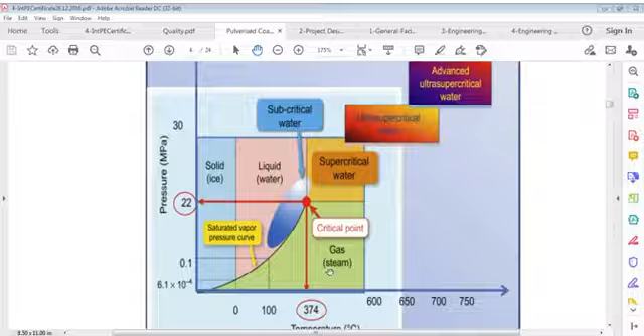When you go from freezing temperature to 374, meaning a rise in temperature - 374 is too high, 100 is the boiling temperature here - between 374 and pressure from 22 MPa to 30, it's liquid water. Of course it's hot, and this range is called subcritical water. This elliptical, parabolic curve represents subcritical water.

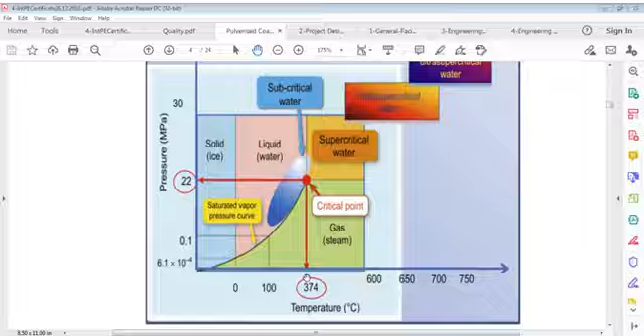If the temperature range goes from 374 onwards to 600, up to pressure 22, this is gas or steam, lying within the range of 374 degrees to 600 degrees. It's too high, even though boiling temperature is 100 - steam starts building in, but 374 is very high. Steam ranges from 374 to 600-800 degrees. This is gas, steam, up to pressure 22 MPa.

If you go in the same temperature range from pressure 22 to 30 MPa, it is supercritical water. So this is subcritical water below 374 degrees Celsius, and between 374 to 600 degrees Celsius with pressure 22 to 30 MPa is supercritical water. And this is gas. Then going further, let's see what happens there.

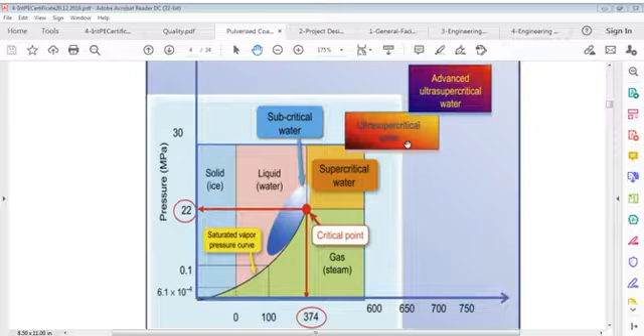This is not shown here - it's called advanced ultra supercritical water. In this stage, ultra advanced ultra supercritical water, and this is ultra supercritical water, where temperature rises and pressure rises.

This is what it shows. Going further, now it discusses supercritical power plants. Supercritical power plants were in service in the late 1950s, but the technology did not really take off due to problems of reliability, especially from metallurgical aspects.

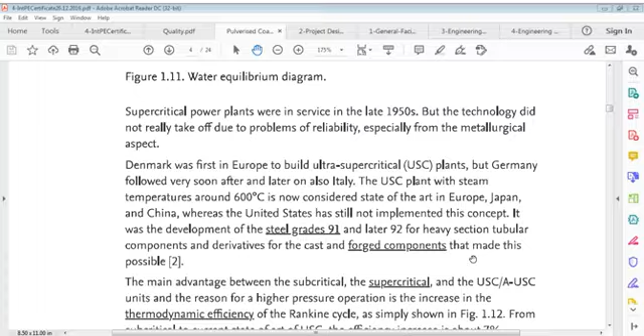Denmark was first in Europe to build ultra supercritical plants, but Germany followed very soon after, and later Italy too. Ultra supercritical plants with steam temperatures around 600 Celsius are now considered state of the art in Europe, Japan and China, whereas the United States has still not implemented this concept.

It was the development of steel grade 91, and later 92, for heavy section tubular components and derivatives for cast and forged components that made this possible.

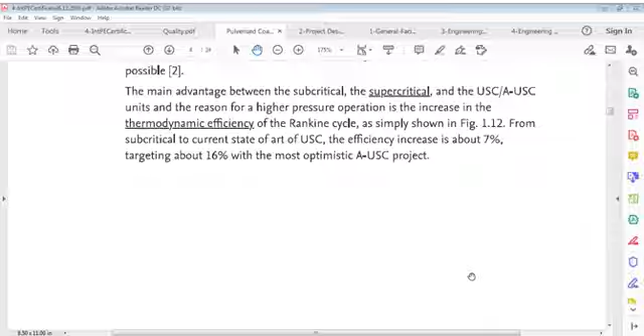The main advantage between subcritical, supercritical and ultra supercritical units, and the reason for higher pressure operation, is the increase in thermodynamic efficiency of the Rankine cycle. From subcritical to the current state of the art ultra supercritical, efficiency increases by about 7%, targeting about 16% with the most optimistic ultra supercritical project.

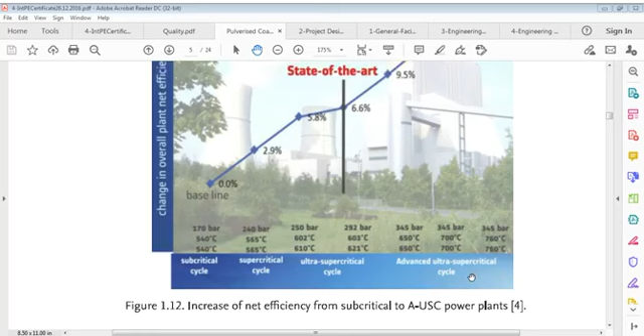Now this curve shows the increase of net efficiency from subcritical to ultra supercritical power plants. Subcritical cycle is here at 170 bar, 540 degrees; supercritical cycle is 565 degrees, 240 bars; ultra supercritical cycle is 250 to 292 bars, 610 to 621 degrees. Then advanced ultra supercritical from 345 bars onwards, at 650, 700 and 760 degrees Celsius. This is the baseline change in overall plant net efficiency.

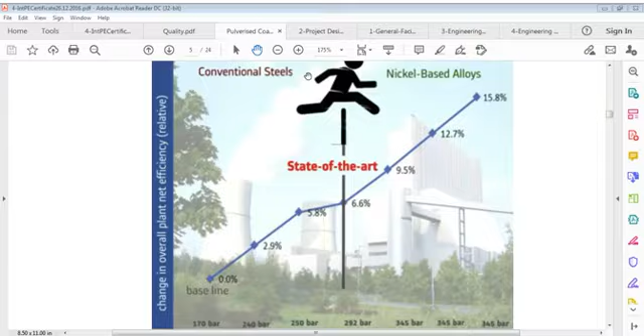This shows conventional steel and nickel based alloys - this is state of the art, with a dividing line here. You see the baseline is here.

0.0%, then it goes to 2.9% in this range, 5.8% at 250 bar with temperature rising - the percentage efficiency shown here too. At the critical line it's 6.6%, at 345 bar and 650 degrees Celsius it's 9.5%, then it goes up to 16%, 15.8% for nickel based alloy.

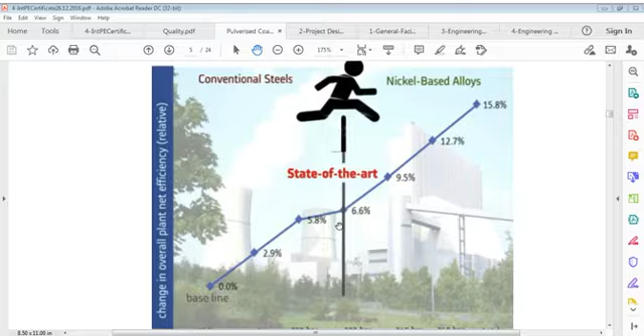So this goes from 6.6% baseline percent to 15.8% with nickel based alloys, compared to conventional steel. So nickel adds to that efficiency, you can say.

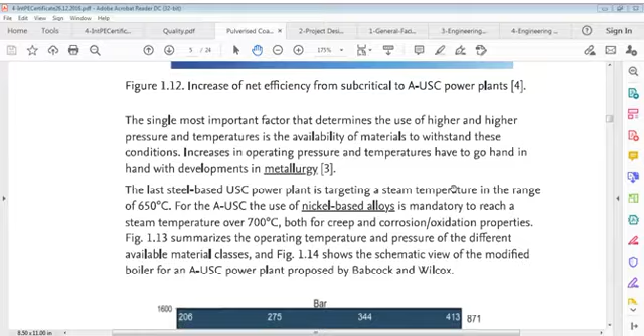Then we come to the single most important factor that determines the use of higher and higher pressures and temperatures: the availability of materials to withstand these conditions. Increases in operating pressure and temperature have to go hand in hand with development in metallurgy.

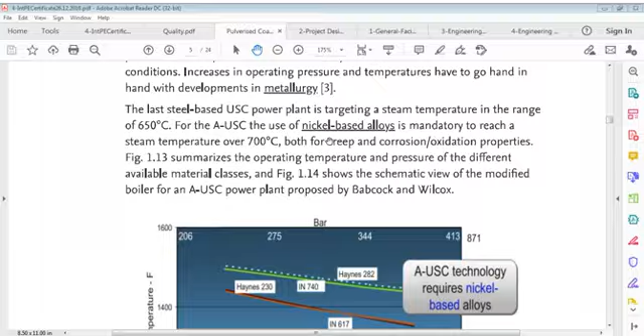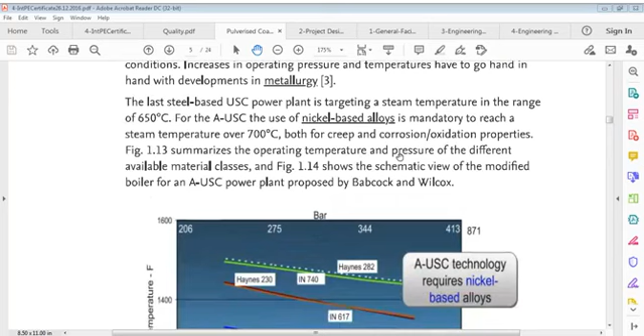Last steel-based ultra supercritical power plant is targeting a steam temperature in the range of 650 degrees Celsius. For A-USC, use of nickel-based alloys is mandatory. Use of nickel-based alloy is mandatory to reach a steam temperature over 700 degrees Celsius, both for creep and corrosion, oxidation properties.

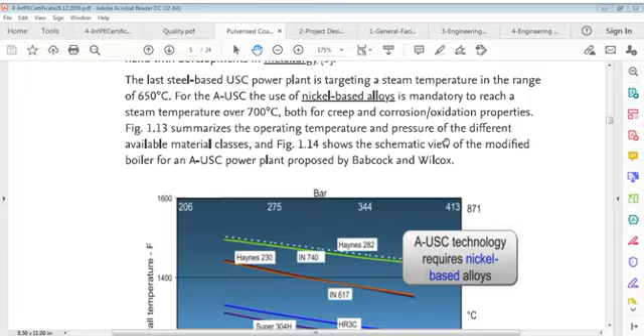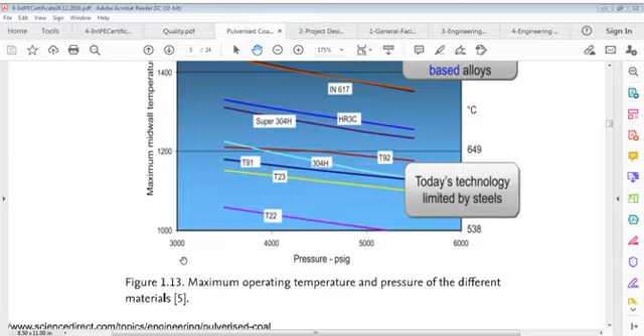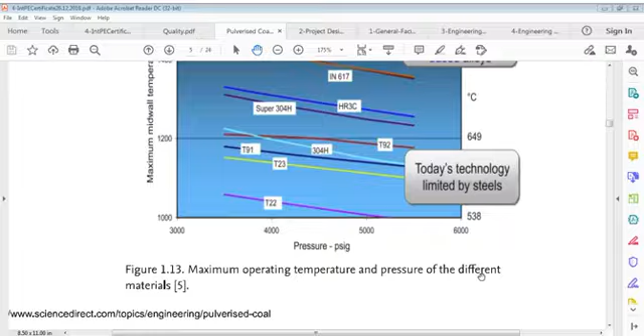This figure summarizes the operating temperature and pressure of different available material classes. Schematic view of a modified boiler for an A-USC power plant project proposed by Babcock and Wilcox. Pressure ranges from 3000 to 6000, and maximum mid-wall temperature is up to 1600 degrees from 1000 onwards. Today's technology is limited by steel, while A-USC technology requires nickel based alloys, shown in this range. Temperature is 1400, from here you can see 617, here 740 - this shows maximum operating temperature and pressure of different materials.

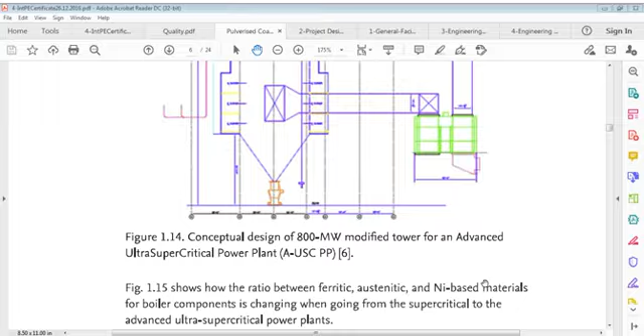Then we go to this diagram, which is a conceptual design of an 800 megawatt modified tower for an advanced ultra supercritical power plant. This is how it works.

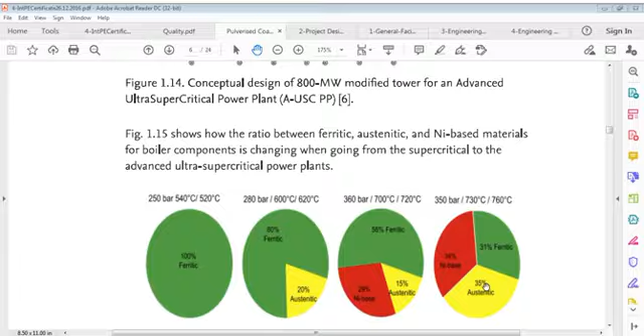This shows the ratio between ferritic, austenitic and nickel based materials for boiler components, changing when going from supercritical to advanced ultra supercritical power plants. At 250 bar, 540/520 degrees, it's ferritic. At 280 bar, 80% ferritic. This is 56% ferritic and this is 31% ferritic - these are various stages.

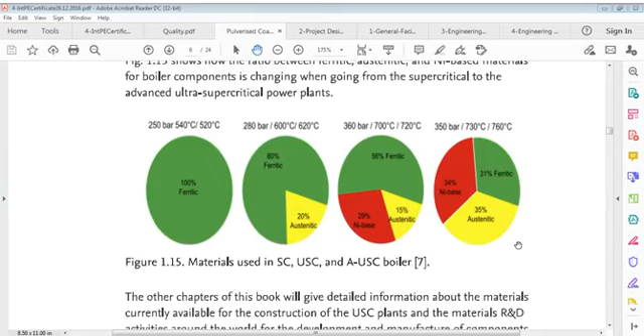Other chapters of this book will give detailed information about the material currently discussed.

Our issue was pulverized coal fired boilers - pulverized coal, which is our topic here. Pulverized coal firing ensures complete combustion of coal, thus ensuring higher efficiency of steam generators. It's predominantly adopted in large coal-fired utility boilers. Finer grinding of coal leads to more efficient combustion.

The total time required from the entry of a coal particle into a furnace to the combustion of the particle is very short. This time, however, is dependent on various factors.

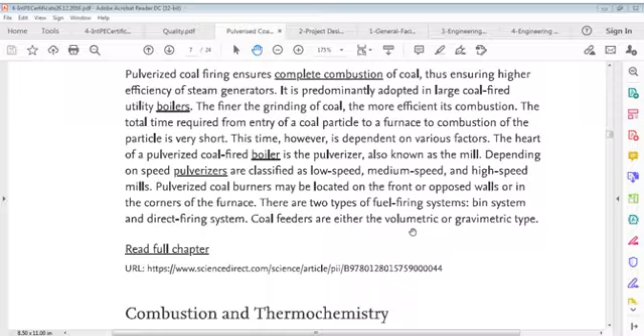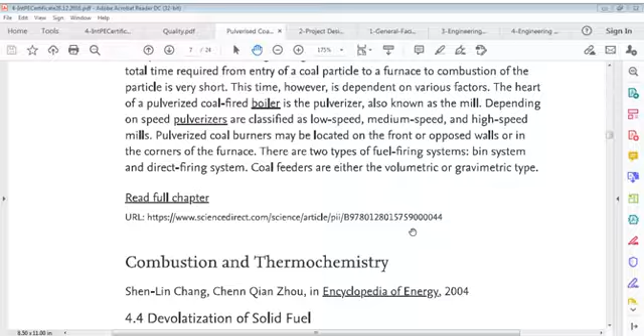The heart of a pulverized coal fired boiler is the pulverizer, also known as a mill. Depending on speed, pulverizers are classified as low speed, medium speed and high speed mills. Pulverized coal burners may be located on front or opposed walls or in corners of the furnace. There are two types of fuel firing systems: bin system and direct firing system. Coal feeders are either volumetric or gravimetric type.

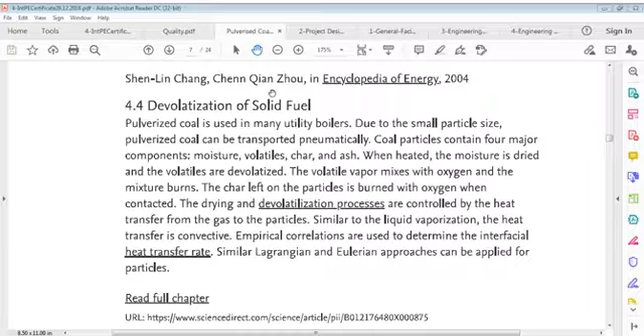Combustion and thermochemistry. Devolatilization of solid fuel - pulverized coal is used in many utility boilers. Due to small particle size, pulverized coal can be transported pneumatically.

Coal particles contain four major components: moisture, volatiles, char and ash.

When heated, moisture is dried out and volatiles are devolatilized. The volatile vapor mixes with oxygen and the mixture burns. The char left on particles is burned with oxygen when contacted.

Drying and devolatilization processes are controlled by heat transfer from gas to particles. Similar to liquid vaporization, heat transfer is convective. Empirical correlations are used to determine the interfacial heat transfer rate. Similar Lagrangian and Eulerian approaches can be applied for particles.

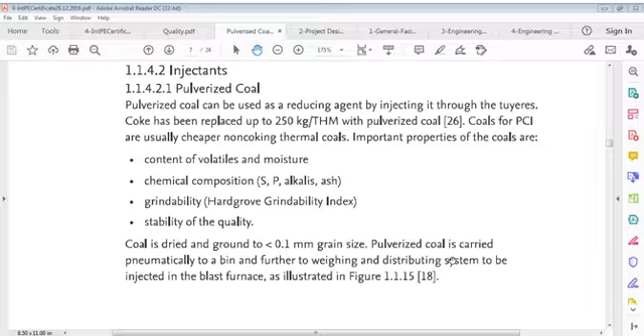Coal is dried and ground to less than 0.1 mm grain size - that's one-tenth of a millimeter. Pulverized coal is carried pneumatically to a bin and further to a weighing and distributing system to be injected into the blast furnace. Let us see this.

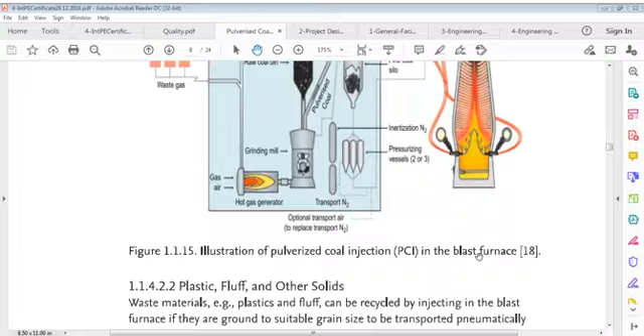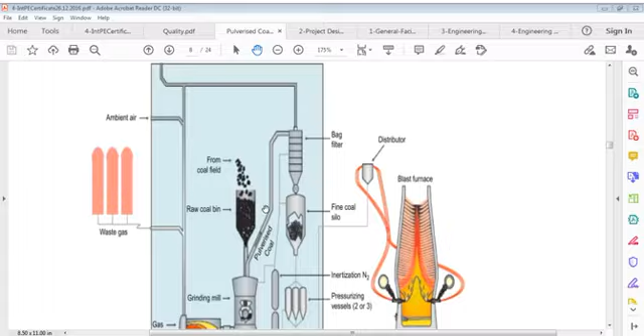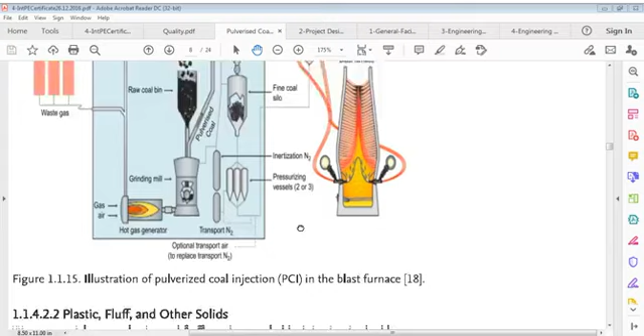Hot gas generator: waste gas and ambient air come here, go to the gas and air hot gas generator, then to the grinding mill. Raw coal comes from the coal field to the raw coal bin, and pulverized coal goes to the bag filter from the fuel gas, ending up in the fine coal silo. It comes via transport nitrogen to the fine coal silo and bag filter, followed by inertization and pressurization.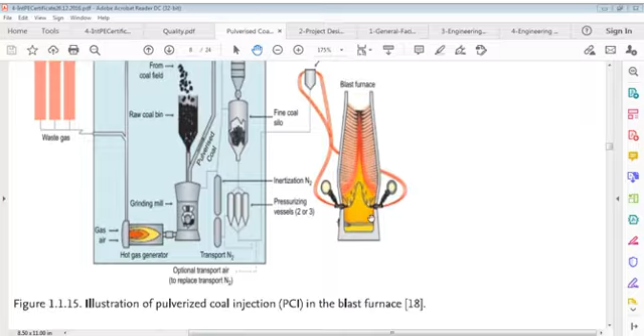Blast furnace. Plastic, fluff, and other solids.

Waste materials like plastics and fluff can be recycled by injecting them in the blast furnace, if they are ground to a suitable grain size to be transported pneumatically, and if they contain enough carbon that can be oxidized.

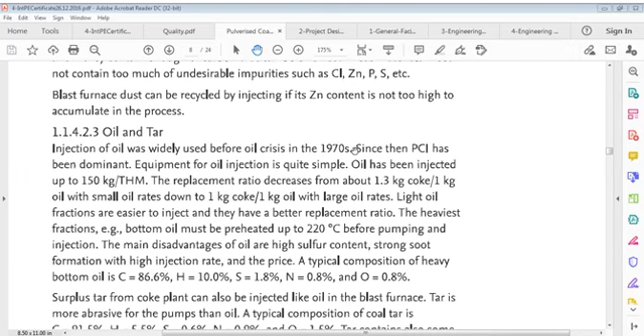These materials must not contain too much undesirable impurities such as Cl, Zn, P, S, etc. Blast furnace dust can be recycled by injecting it if its Zn content is not too high to accumulate in the process. Oil and tar.

Injection of oil was widely used before the oil crisis in the 1970s. Since then, pulverized coal injection has been dominant. Equipment for oil injection is quite simple.

Oil has been injected up to 150 kg per THM. Replacement ratio decreases from about 1.3 kg coke per 1 kg oil with small oil rates down to 1 kg coke per 1 kg oil with large oil rates.

Light oil fractions are easier to inject and have a better replacement ratio. Heaviest fractions, bottom oil, must be preheated up to 220 degrees Celsius before pumping and injection. Main disadvantages of oil are high sulfur content, strong soot formation with high injection rate, and price.

A typical composition of heavy bottom oil is C = 86.6%, H = 10%, S = 1.8%, N = 0.8%, and O = 0.8%.

Surplus tar from the coke plant can also be injected like oil in the blast furnace. Tar is more abrasive for pumps than oil, and its composition is given here.

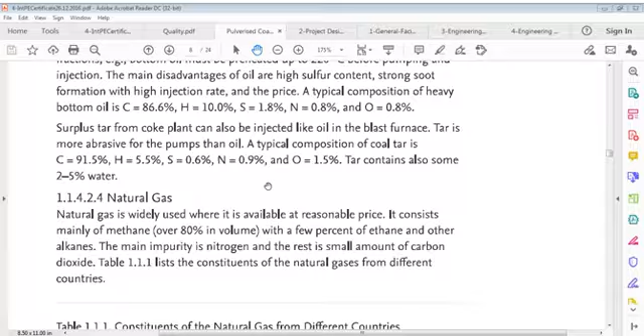Natural gas is widely used where available at reasonable price. It consists mainly of methane, over 80% in volume, with a few percentage of ethane and other alkanes. Main impurity is nitrogen, and the rest is a small amount of carbon dioxide.

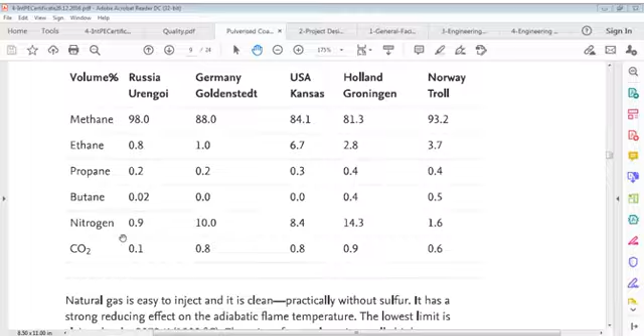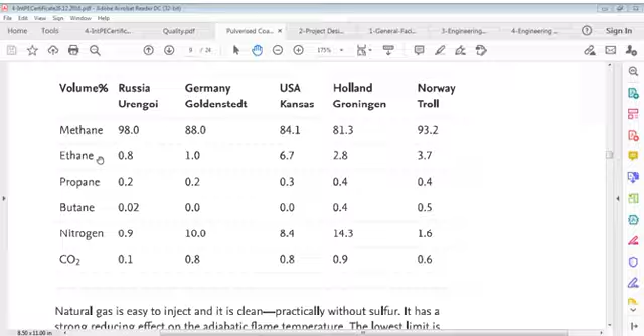Natural gas is easy to inject and clean, practically without sulfur. It has a strong reducing effect on adiabatic flame temperature; the lowest limit is claimed to be 2073 Kelvin or 1800 Celsius. The price of natural gas is really high.

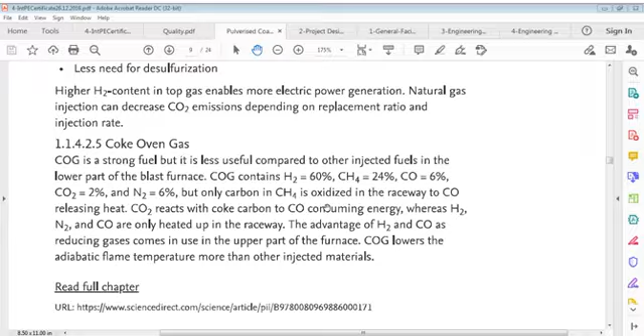Low sulfur content brings several benefits: better working conditions in the cast house, higher carbon content in hot metal, and less need for desulfurization. Higher H2 content in top gas enables more electric power generation. Natural gas injection can decrease carbon dioxide emission depending on replacement ratio and injection rate.

Coke oven gas, COG, is a strong fuel but less useful compared to other injected fuels in the lower part of the blast furnace. Coke oven gas contains hydrogen H2 60%, CH4 24%, carbon monoxide 6%, carbon dioxide 2%, and nitrogen 6%.

Only CH4 is oxidized in the raceway to carbon monoxide, releasing heat. CO2 reacts with coke carbon to form CO, consuming energy, whereas H2, N2 and CO are only heated up in the raceway. The advantage of H2 and CO is they are reducing gases.

They come into use in the upper part of the furnace. COG lowers adiabatic flame temperature more than other injected materials. Electric power generation, fossil fuel.

Pulverized coal combustion in supercritical steam cycle.

Pulverized coal fired supercritical steam boilers have been in use since the 1930s, but improvements in materials and increasing demands for higher efficiency are making this the system of choice for new coal-fired utility plants worldwide.

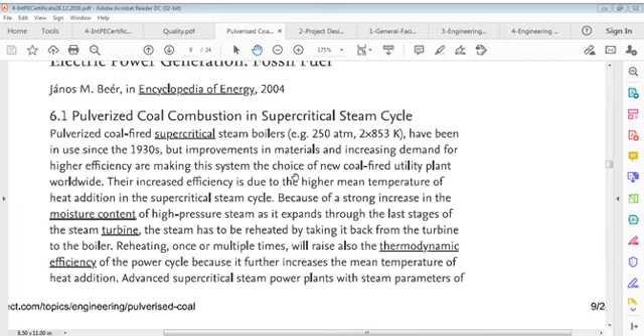Increased efficiency is due to higher mean temperature of heat addition in the supercritical steam cycle, because of the strong increase in moisture content of high pressure steam as it expands through the last stages of the steam turbine.

Steam has to be reheated by taking it back from the turbine to the boiler. Reheating once or multiple times will also raise the thermodynamic efficiency of the power cycle because it further increases the mean temperature of heat addition.

Advanced supercritical steam power plants with steam parameters of 300 atm pressure, temperatures of 866 Kelvin, and cycle efficiency up to 43% are expected to play a major role in new power generation in the near future.

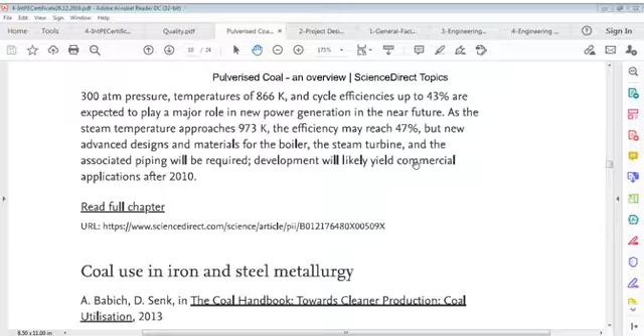As steam temperature approaches 973 Kelvin, efficiency may reach 47%, but new advanced designs and materials for the boiler, steam turbine, and associated piping will be required. These developments will yield commercial application soon.

Coal used in iron and steel manufacturing, steel metallurgy, and blast furnace iron making. Carbon used in the blast furnace in the form of both coke and auxiliary reducing agent is discussed now.

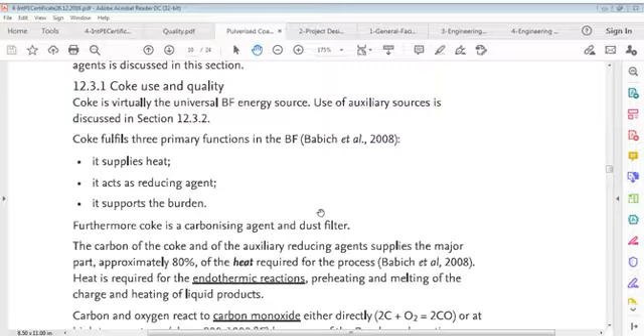Coke use and quality: coke is virtually a universal energy source. Coke fulfills three primary functions - it supplies heat, it acts as a reducing agent, and it supports the burden. Coke is also a carbonizing agent and dust filter.

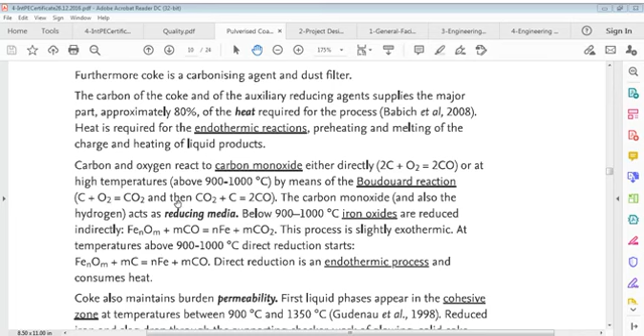Carbon of coke and of the auxiliary reducing agent supplies the major part, approximately 80%, of the heat required for the process - heat required for endothermic reactions, preheating, and melting of charges.

Carbon and oxygen react to form carbon monoxide, either directly via 2C plus O2 gives 2CO, or at high temperature of 900 to 1000 degrees Celsius by means of the Boudouard reaction.

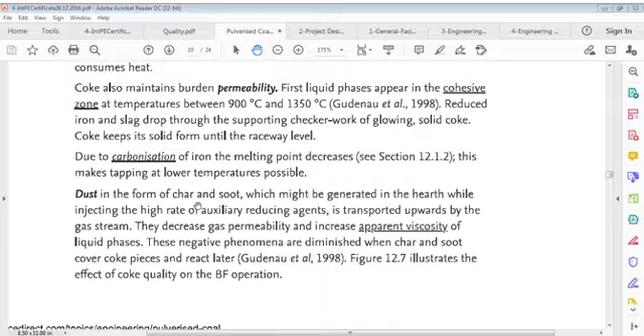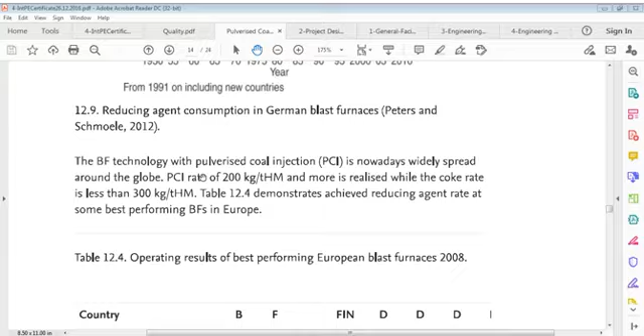What we are searching for is coke degradation, alright, it's all that. For our purposes, the other one - this is reducing agent consumption of German blast furnaces, year-wise. Then we can go on further, it's very technical, so no need to waste time here.

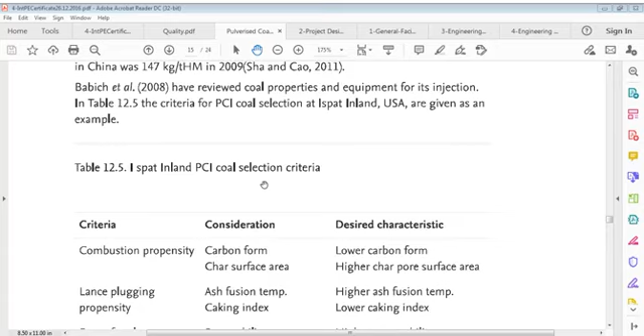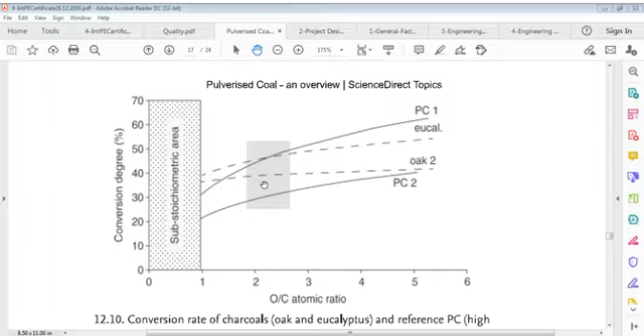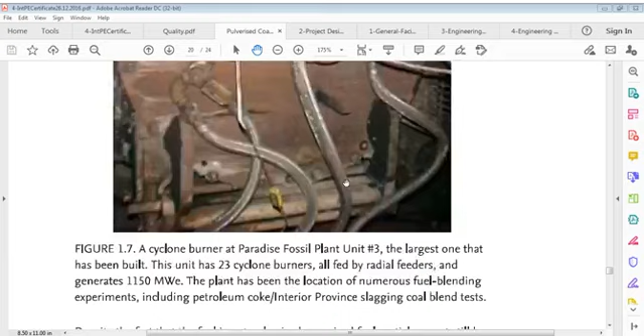I'm interested in pulverization, that's very important, and this is conversion degree. Types of firing systems - this is here, cyclone burner at Paradise fossil plant. Well, I think there's not much available for this. Let us see what it says.

Pulverized coal consists mostly of particles capable of passing through a 200 mesh screen, which corresponds to a diameter of 74 microns and lower. For coals of high volatility and low ash content, combustion characteristics are comparable to those of liquid fuel sprays.

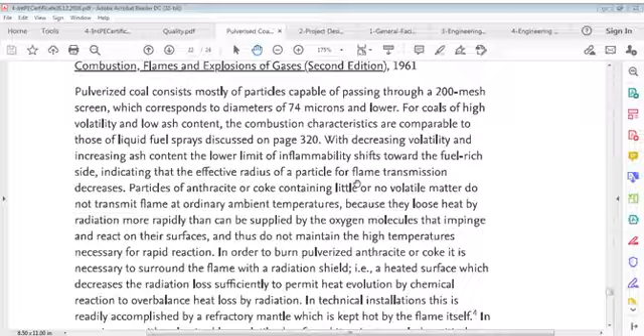With decreasing volatility and increasing ash content, the lower limit of inflammability shifts towards the fuel-rich side, indicating the effective radius of a particle for flame transmission decreases.

Particles of anthracite or coke containing little or no volatile matter do not transmit flame at ordinary ambient temperatures, because they lose heat by radiation more rapidly than can be supplied by oxygen molecules that impinge and react on their surfaces, and thus do not maintain the high temperatures necessary for rapid reaction. In order to burn pulverized anthracite coke, it's necessary to surround the flame with a radiation shield.

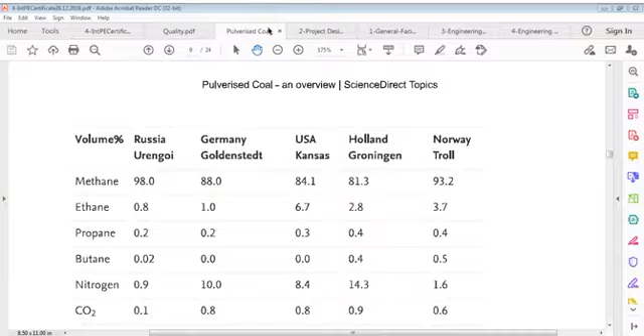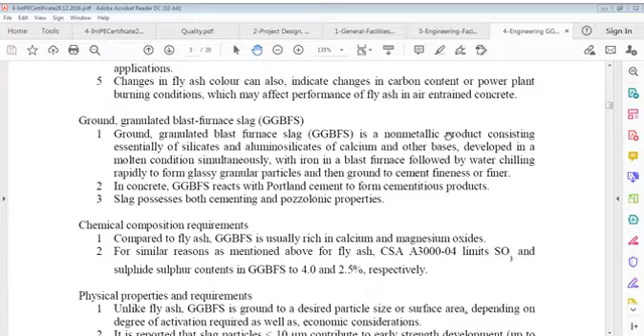Alright, I think this is over. So we have gone through this talk. We're going to find more material after that, so better I close this for now, and go back to that file - where is that? And project designs, general facilities - I think this is engineering facilities, petrochemicals. This is GGBS, that's what I was talking about. We're talking about this, we are here, we've gone like this.

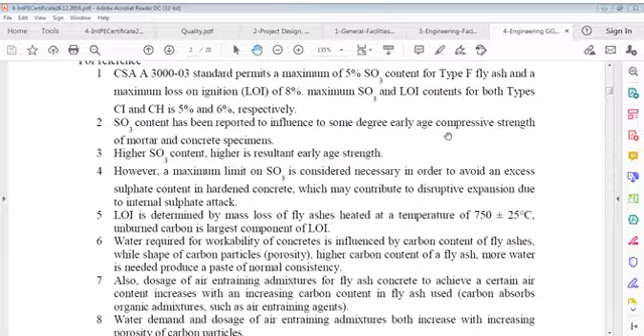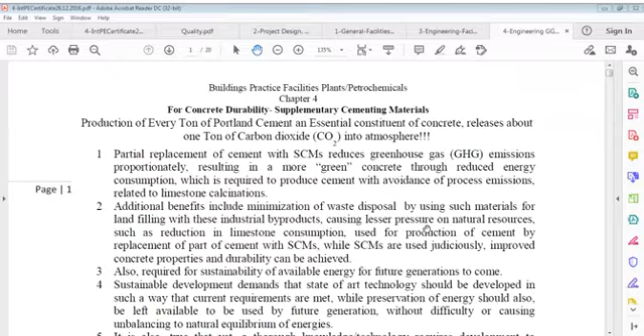Fly ash, yes, this is what we're talking about - fly ash. Just for your refreshing information, we are talking about supplementary cementing materials, and this is one of those supplementary cementing materials - PFA, pulverized fuel ash.

Fly ash is finely divided residue resulting from the combustion of pulverized coal that is carried from the combustion chamber of a furnace by exhaust gases.

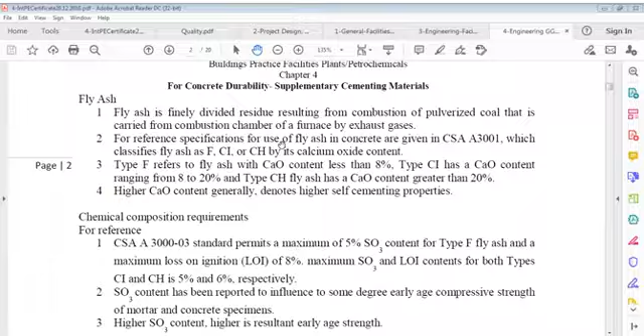For reference, specifications for use of fly ash in concrete are given; whatever the specification, leave it behind.

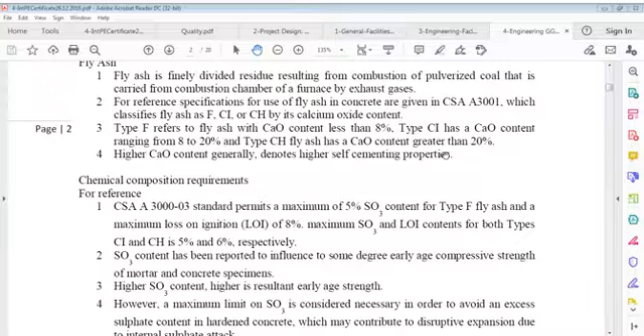Classification of fly ash is done as Type F, CI, or CH by its calcium oxide content. Type F refers to fly ash with calcium oxide content less than 8%. Type CI has calcium oxide content ranging from 8 to 20%, and Type CH fly ash has calcium oxide content greater than 20%. Higher calcium oxide content generally denotes higher self-cementing properties.

Then chemical composition requirements. Standard CSA A3000-03 permits a maximum of 5% SO3 content for Type F fly ash and a maximum loss on ignition (LOI) of 8%. Maximum SO3 and LOI contents for both Types CI and CH are 5% and 6% respectively.

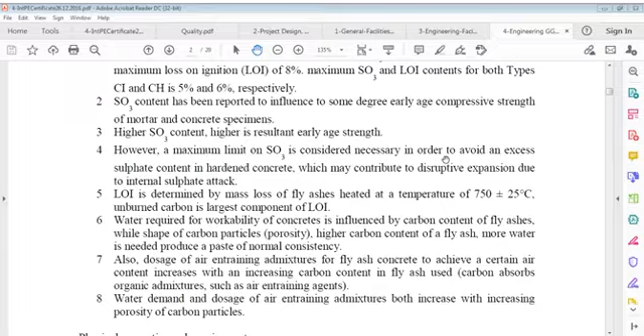SO3 content has been reported to influence, to some degree, the early age compressive strength of mortar and concrete specimens. Higher SO3 content results in higher early age strength. However, a maximum limit on SO3 is considered necessary to avoid excess sulfate content in hardened concrete, which may contribute to disruptive expansion due to internal sulfate attack. So concrete must have a boundary for how much sulfur content is acceptable.

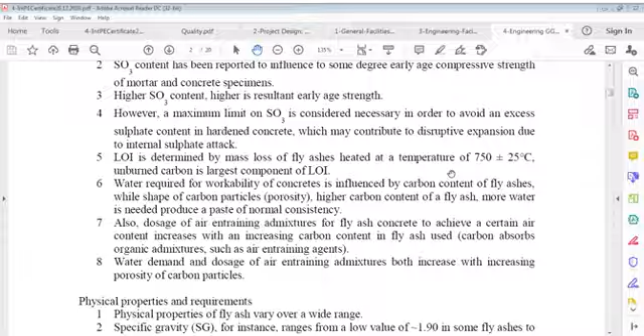Loss on ignition (LOI) is determined by the mass loss of fly ash heated at a temperature of 750 plus or minus 25, meaning 725 to 775. Unburned carbon is the largest component of LOI.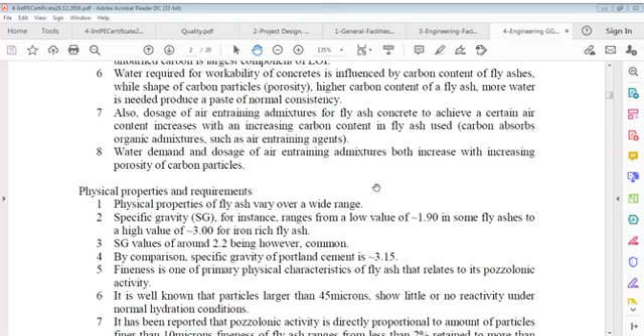Water required for workability of concrete is influenced by the carbon content of fly ash, while the shape of carbon particles relates to porosity. Higher carbon content in fly ash means more water is needed to produce a paste of normal consistency. Also, doses of air entraining admixtures for fly ash concrete to achieve a certain air content increase with increasing carbon content, since carbon absorbs organic admixtures such as air entraining agents. Water demand and doses of air entraining admixtures both increase with increasing porosity of carbon particles.

Physical properties and requirements: physical properties of fly ash may vary over a wide range. Specific gravity, for instance, ranges from a low value of 1.9 in some fly ashes to a high value of 3 for iron-rich fly ash, with a value of around 2.2 being common. By comparison, the specific gravity of Portland cement is 3.15.

Fineness is one of the primary physical characteristics of fly ash that relates to its pozzolanic activity. It's well known that particles larger than 45 microns show little or no reactivity under normal hydration conditions. It's been reported that pozzolanic activity is directly proportional to the amount of particles finer than 10 microns. Fineness of fly ash ranges from less than 2% retained to more than 30% retained on a 45 micron sieve.

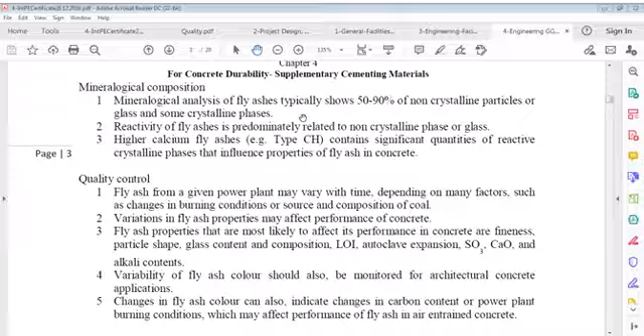Quality control: fly ash from a given power plant may vary with time depending on factors such as changes in burning conditions or the source and composition of coal. Variations in fly ash properties may affect the performance of concrete. Fly ash properties most likely to affect its performance in concrete are fineness, particle shape, glass content, composition, loss on ignition, autoclave expansion, SO3, CaO, and alkali content.

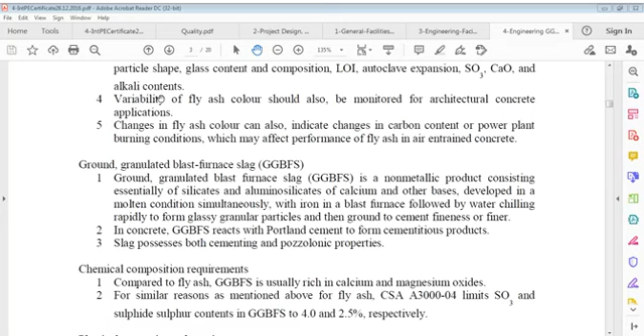Variability of fly ash color should also be monitored for architectural concrete applications. Changes in fly ash color can also indicate changes in carbon content or power plant burning conditions, which may affect performance of fly ash in air-entrained concrete.

Ground granulated blast furnace slag, GGBFS.

Ground granulated blast furnace slag, very important material from every viewpoint. I think it's the most reliable one, GGBS. Ground granulated blast furnace slag is a non-metallic product consisting essentially of silicates and aluminosilicates of calcium and other bases. Developed in a molten condition simultaneously with iron in a blast furnace, followed by water chilling rapidly to form glassy granular particles, and then ground to cement fineness or finer.

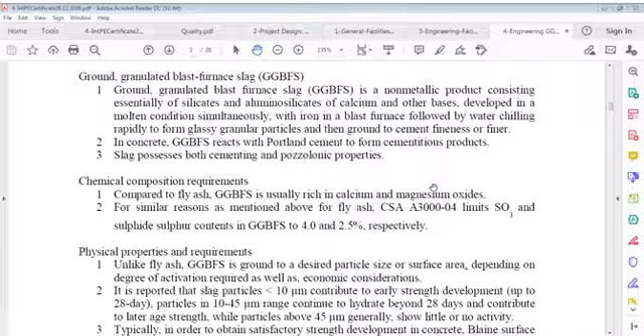Chemical composition requirements. Compared to fly ash, GGBS is usually rich in calcium and magnesium oxides. For similar reasons as mentioned above for fly ash, CSA A3000-04 limits SO3 and sulfide sulfur contents in GGBS to 4% and 2.5% respectively.

Physical properties and requirements. Unlike fly ash, GGBS is ground to desired particle size or surface area depending on degree of activation required as well as economic considerations. It's reported that slag particles less than 10 microns contribute to early strength development up to 28 days. Particles in the 10 to 45 micron range continue to hydrate beyond 28 days and contribute to later age strength, while particles above 45 microns generally show little or no activity, typically in order to obtain satisfactory strength development in concrete. Blaine surface area of GGBS ranges between 4,000 to 6,000 centimeters square per gram. In order to avoid disruptive expansion of concrete containing GGBS due to MgO content, expansion is limited to 0.8%.

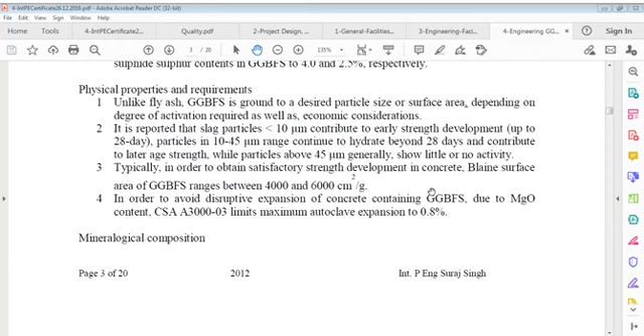Now, mineralogical composition. Mineralogical analysis of GGBS samples shows glass content ranging between 80 to 100%. As with fly ash, reactivity of GGBS is strongly dependent on glass content.

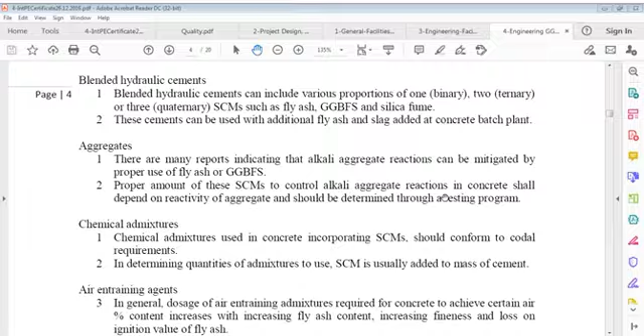Now, blended hydraulic cement. Blended hydraulic cements can include various proportions of binary (1), ternary (2), or quaternary (3) supplementary cementing materials such as fly ash, GGBS, and silica fumes. These cements can be used with additional fly ash and slag added at the concrete batching plant.

Aggregates. There are many reports indicating that alkali aggregate reactions can be mitigated by proper use of fly ash or GGBS. The proper amount of these SCMs to control alkali aggregate reactions in concrete shall depend on reactivity of the aggregate and should be determined through a testing program.

Chemical admixture. Chemical admixtures used in concrete incorporating SCMs should conform to codal requirements.

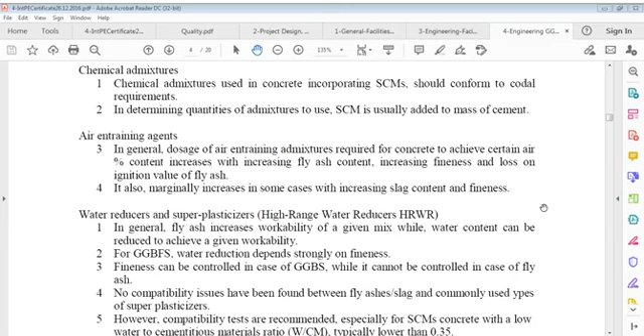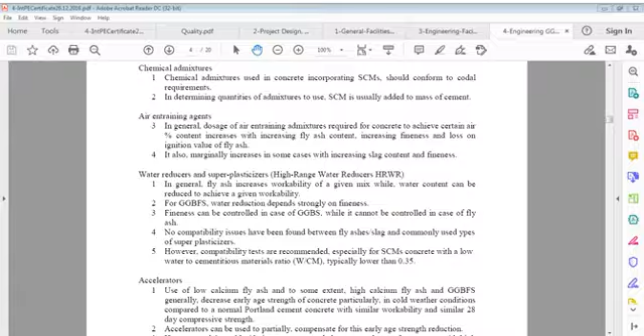So here, back, I can say now we can say that there are many reports indicating that alkali aggregate reactions can be mitigated by proper use of fly ash or GGBS. So for neutralizing alkali aggregate reactions, GGBS or fly ash are solutions. The proper amount of these SCMs to control alkali aggregate reactions in concrete shall depend on reactivity of the aggregate and should be determined through a testing program.